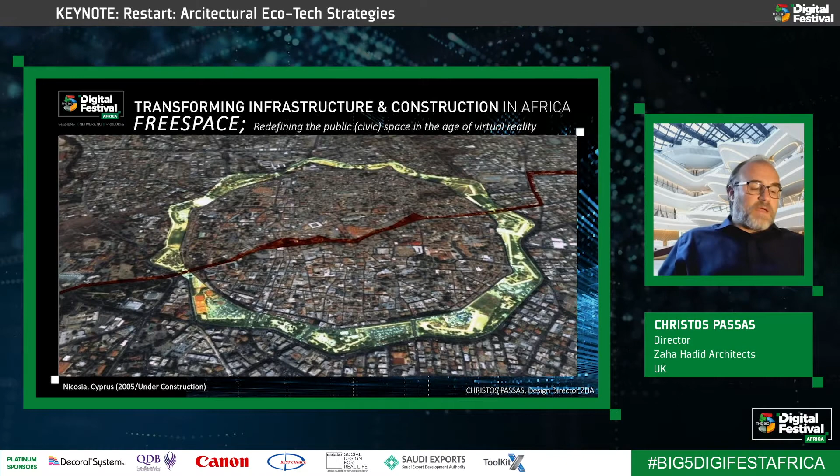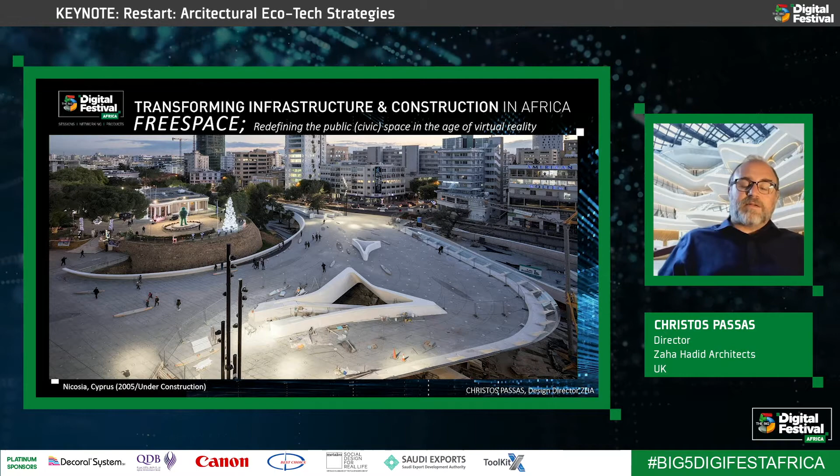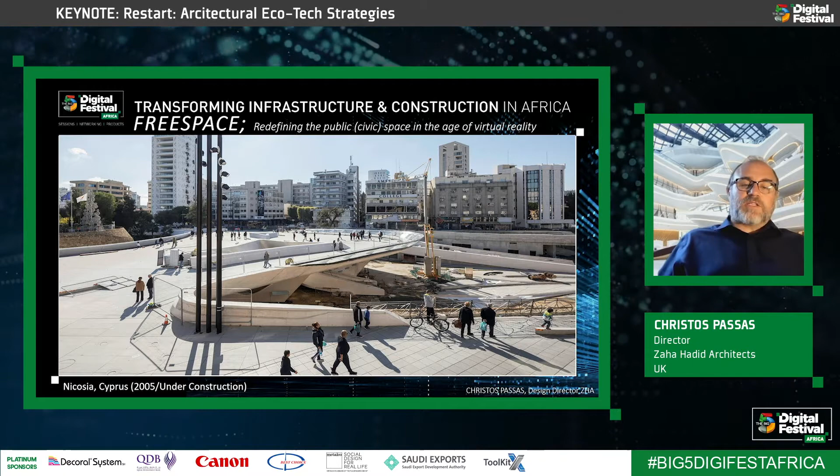In essence, our approach in architectural terms takes the shape of a big white plaza that is floating over the particular moat, and actually becomes a place of congregation, but also a place of transition for the people of this town. So the idea of free space becomes an interesting model for the reinvigoration of urban territories.

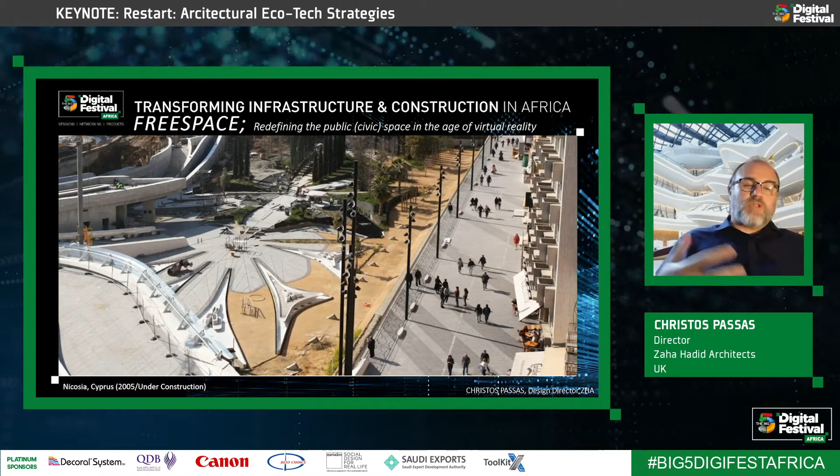By introducing both greenery and landscape, but also civic articulations into the urban domain, it can become much more designed and much more appropriated toward the diversity of functions in cities.

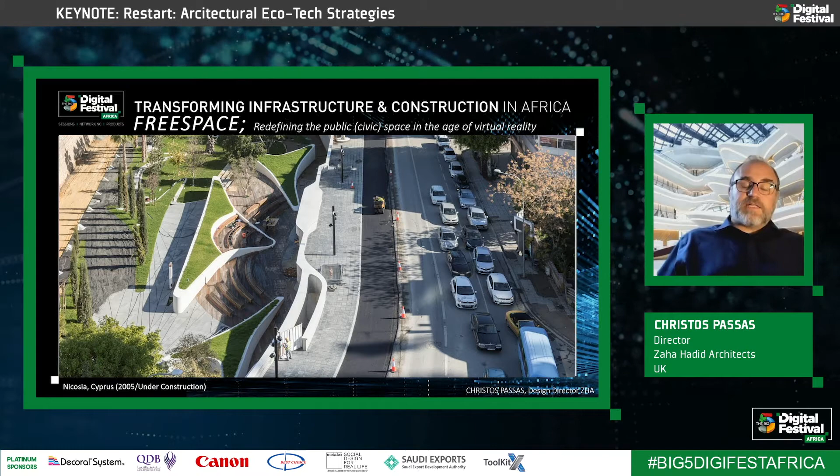And this is the intervention. As you can see, the site that extends from against the Venetian wall makes an intentional attempt to recognize the archaeological monument, while at the same time it comes through as an articulation of a mutant project, a hybrid project that is both architectural and landscaping at the same time.

For me, this is one of the ways through which we can begin to interact with our spaces, but also a means or a method through which we can begin to combine architectural and landscaping techniques together.

This second project I'd like to show you is a project competition we've done for one of our clients in Moscow. It's a project on a very busy site that neighbors a highway, a train station, and also a complex of buildings on the back of our building.

And the program was quite dense because it required a number of facilities such as a business and cultural center, but also a number of other complementary facilities, such as an auditorium for 1,600 people, a school of medicine, an Olympic-sized swimming pool, a train transportation hub.

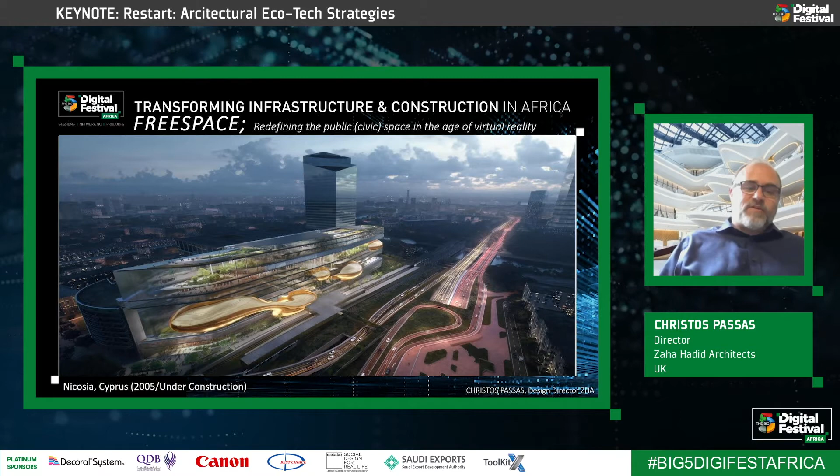So the idea here was to create a number of systems. The shelving system, which is the horizontal floors, are connected by a series of crossing escalators that you can see on this drawing, while at the same time, all the cultural program gets installed within these fluid, bubbly shaped spaces.

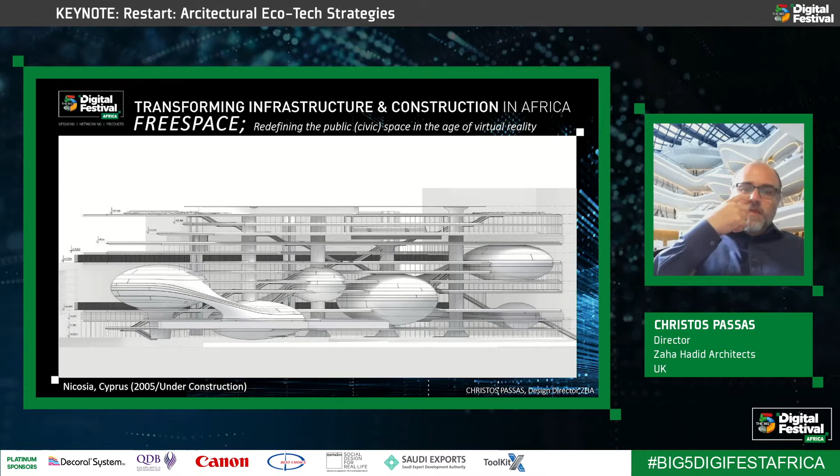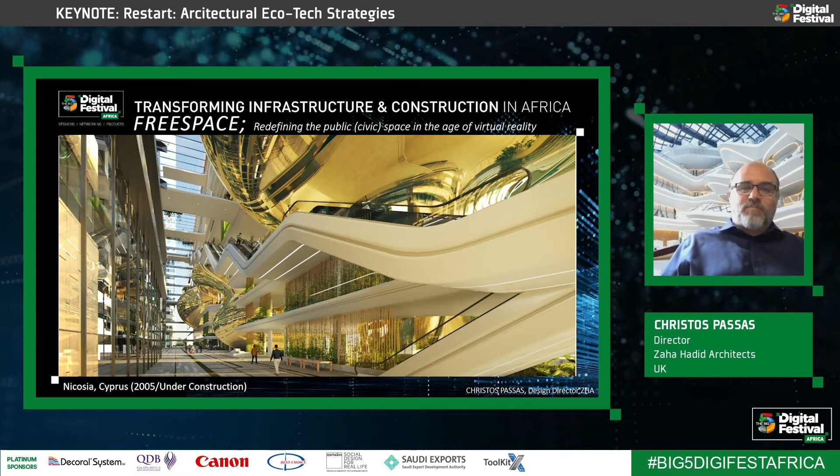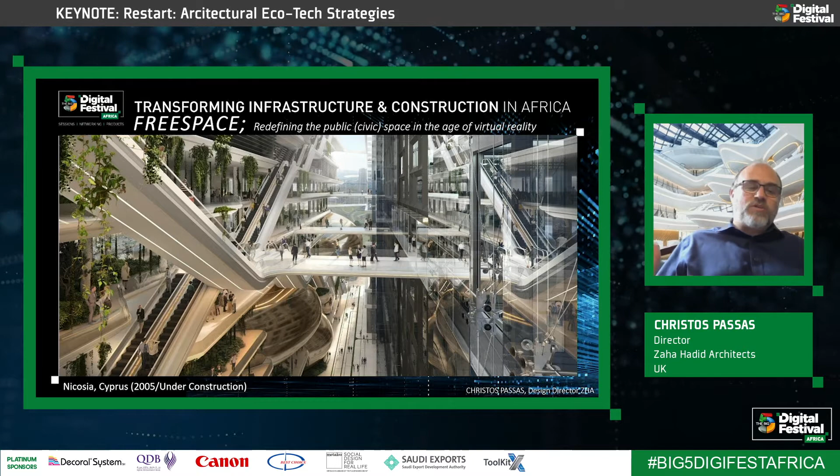And in this way, we develop mechanisms to separate the cultural from the business program, while at the same time proposing free spaces within what would otherwise be a private building, using the occasion of erecting this building to create public spaces, gardens and terraces that come into existence as people begin to use them for public rather than private functions. The space between these two buildings becomes an important interstitial space, where movement of people from the bank, the business institutions, and the cultural components begins to come together in a new type of city that shares this free space.

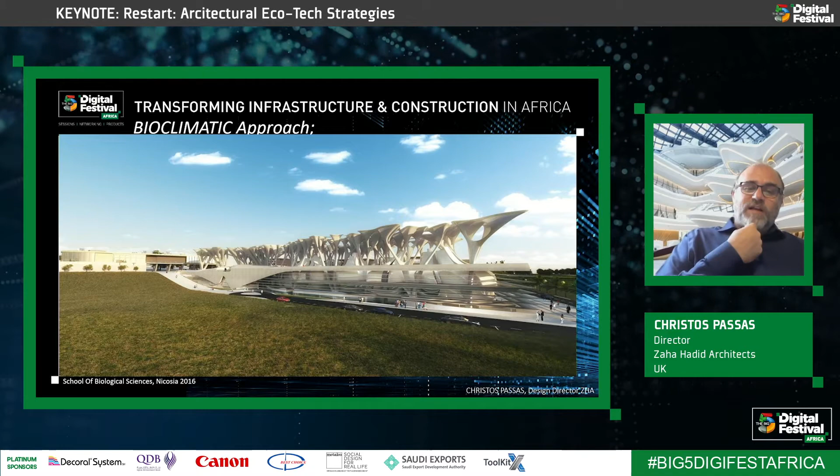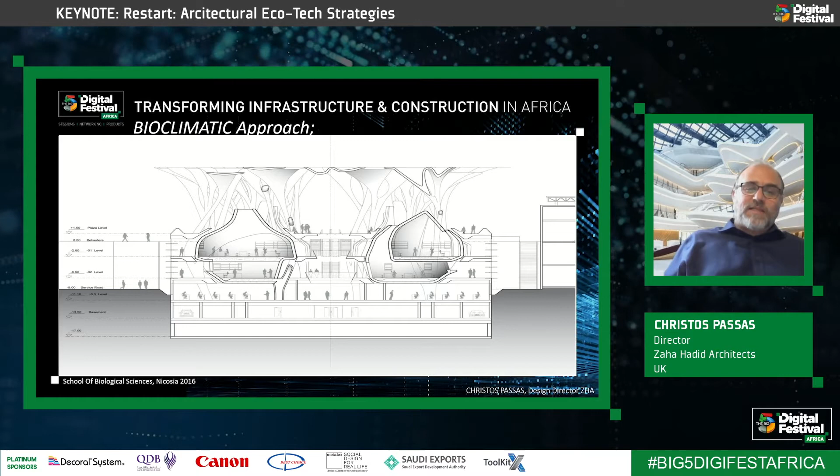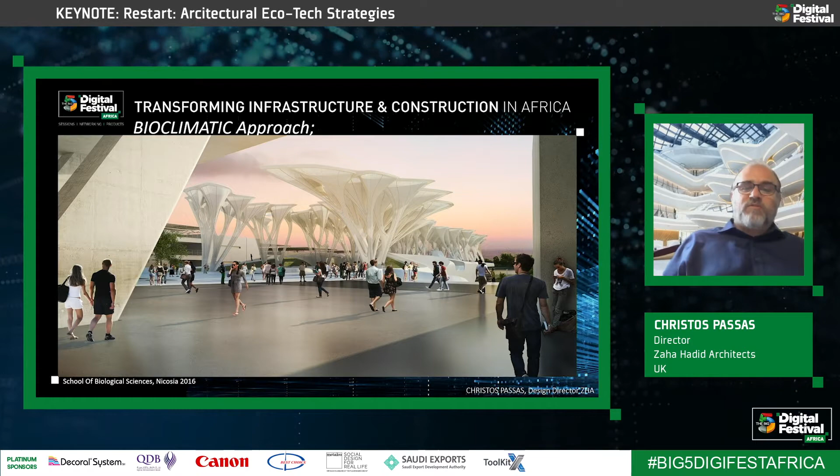However, it's also interesting to observe that these canopies, built out of fabric, can also provide a lot of shading for the spaces below, reducing the thermal heat gain of the project, and in that sense also provide a nicely shaded piazza for the students of the university to meander around. So we believe there are novel architectonic ways to use bioclimatic concerns to create interesting architectural propositions that have both a sustainable angle and a beautiful architectural outlook.

The third approach I'd like to introduce is through a project we did in Belgrade, Serbia, a few years ago. In this case we concerned ourselves quite a lot with the idea of a bionic constellation, meaning the fusion of architectural and landscape design into one whole. Because the program was so complex, it had a number of residences, a business center, a shopping mall, and an existing hotel that needed to be renovated.

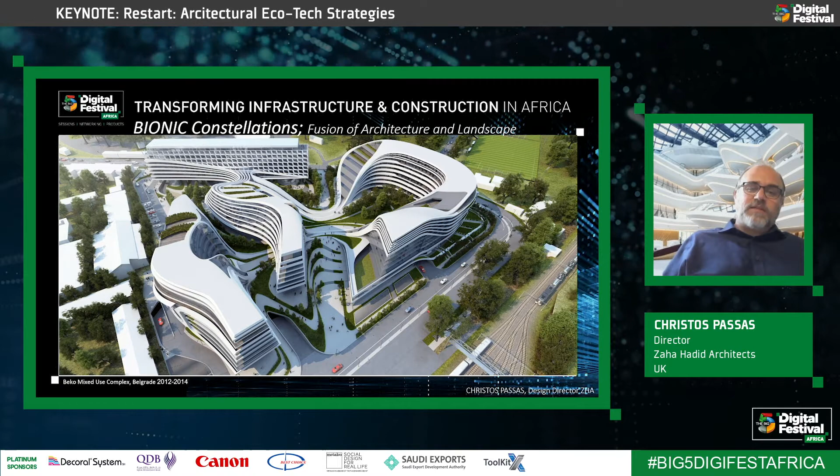We wanted to bring this whole community within one integrated whole, and what better way to enrich this otherwise urban mixed-use environment with a series of gardens and landscape terraces that allow people to enjoy in their day-to-day life. What we've learned is that planning these two things together can open up new possibilities for architectural expression, but also landscape integration into these otherwise large and, in many cases, dry mixed-use developments.

So this idea of developing bionic architectural propositions can also be extrapolated into the idea of 3D cities, meaning constellations of urban projects that come together not as a singular use or as a kind of layered mixed-use program starting from the street level, but by introducing a number of sky bridges, the program can now become a lot more interestingly developed.

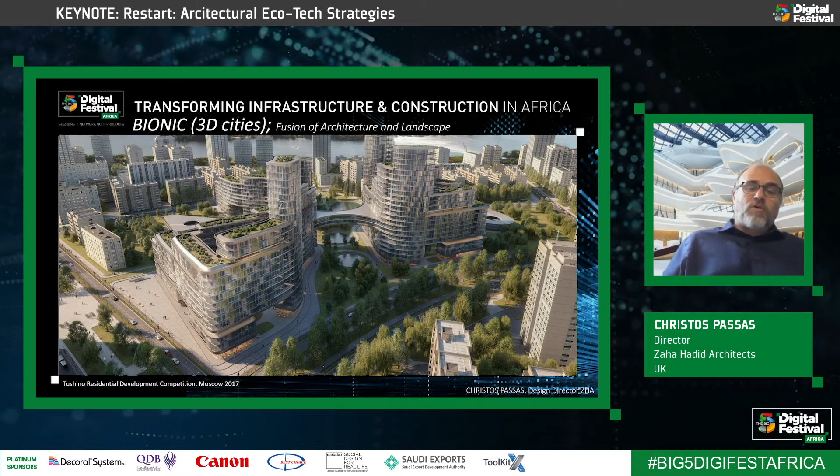In those bridges, one can see retail expanded inside, so people can go shopping without really exiting the complex in which they live, using some of the terraces of the volumes to create sky parks on top of different areas, but also using horizontal program to bring in other functions, such as business functions, public concentrations, and also using the general landscape around them for recreation, for promenades, etc.

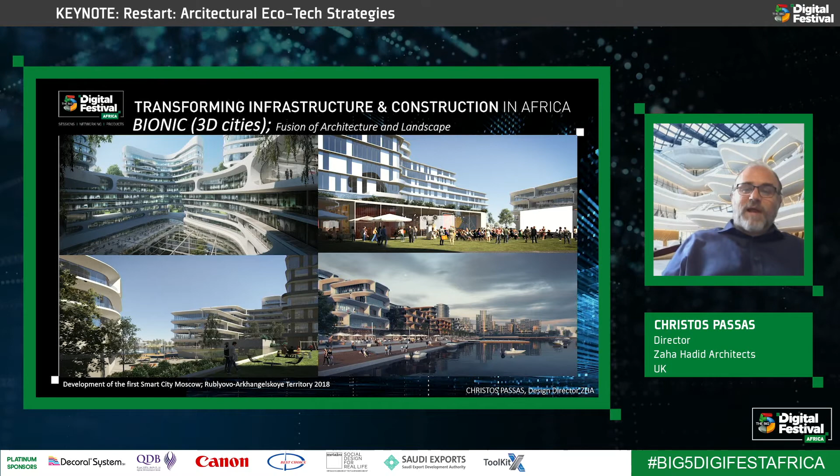So the idea of creating these 3D cities forces us to explore how we can reorganize architectural compositions so that they don't exclusively take the ground as a basis, but create multiple grounds across different levels, enabling horizontal public movement through buildings to enhance circulation and to differentiate to a large degree the program that happens inside them.

Talking about this kind of bionic architecture, we do need to see the purpose of it, and one desired outcome is always this kind of new vitality. In many cases nowadays we're being asked to integrate natural landscapes together with technology. This makes a very interesting proposition, because the development of technology seems to be going hand in hand with our increased understanding of ecological considerations. The more our thinking moves in one direction, it also seems to be moving in another direction as well.

So what I would like to propose is that we bring these two aspects together and fuse them into a new kind of landscape, a new kind of ecology or ecosystem that allows human beings to live within it, but at the same time have the opportunity to be stewards and managers of these ecosystems, protectors of these ecosystems.

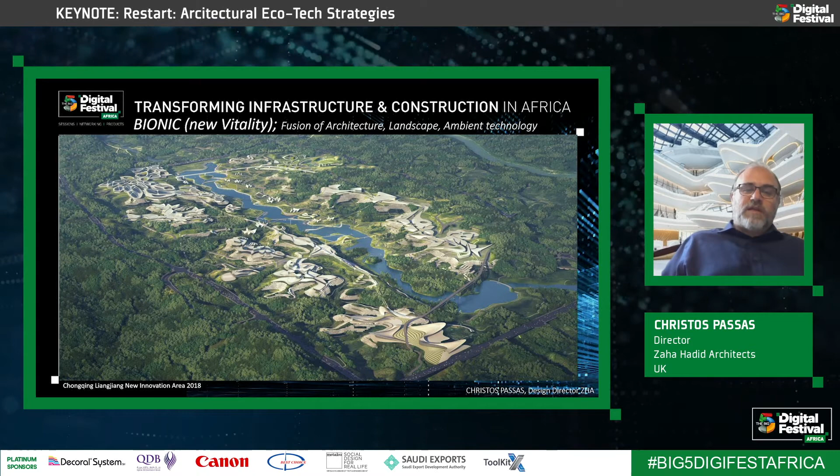In this particular case, this new innovation area in China was developed as a series of high-tech campuses embedded within the hillsides of this valley. Our approach was to divert one of the nearby rivers and flood the valley in the middle so we can create areas of recreation, areas where the buildings could be cooled during their cycle, and at the same time enhance the greenery around it.

Of course, there is a lot of information one needs to absorb in a relatively short amount of time to understand what this environment is all about. So when we went there, we took as much information about this site as we could from the client and other government organizations, and we analyzed these slopes and hills so we could understand what the topography could give us as opportunities for development.

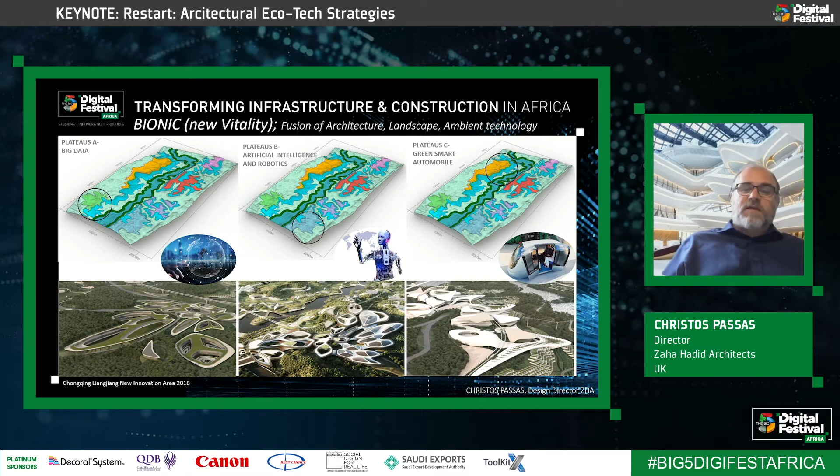Within that, we inserted these underground or submerged campuses for big data analysis centers, for artificial intelligence and robotics factories, and green and smart automobile research centers. Each one of these clusters is an economy or a kind of research institute by itself, while at the same time, the landscape is ever present around them.

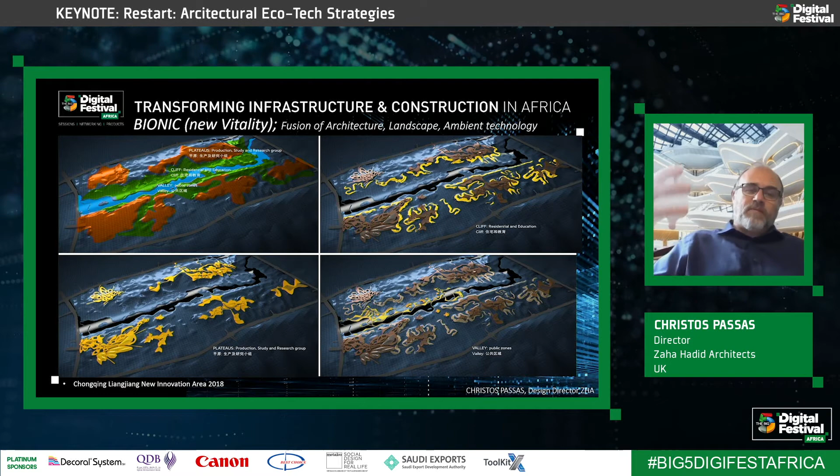By beginning to understand things this way and using digital techniques to analyze these highly complex ecosystems, we can begin to think about embedding architecture in a productive way within the landscape without destroying it and without affecting its life cycle throughout the year.

So the whole point of this is to rediscover the romantic qualities of the natural landscape, while at the same time allowing development to happen, but in a much more sensitive and sensible way as we go forward. So one can see these landscapes as romantic landscapes, like a kind of English garden type approach, but at the same time, it can be highly technological.

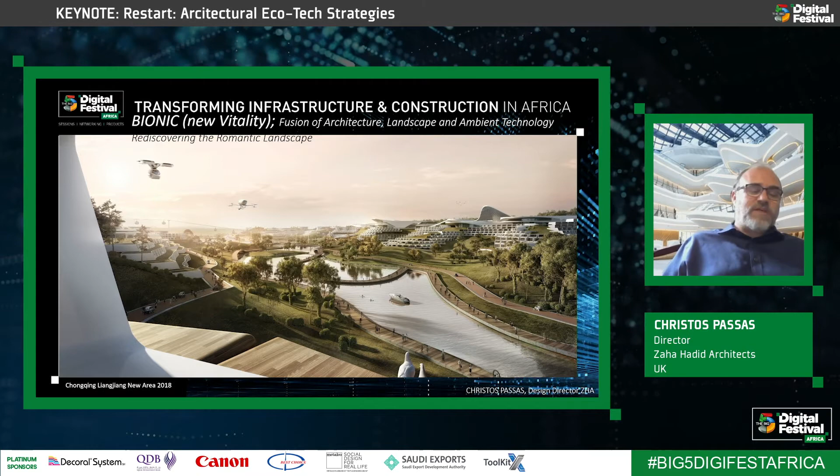It can use smart systems to move people around, and also smart and novel construction techniques to build what may be interesting and complex architectural forms that reflect the necessities of contemporary life and industry.

At the same time, we are beginning to learn that coastal areas have serious risks in terms of rising water levels, but not only that—which is more frequently in the media—there are also other issues in coastal cities, such as high winds and other environmental conditions that need to be negotiated when somebody plans a development on the seashore.

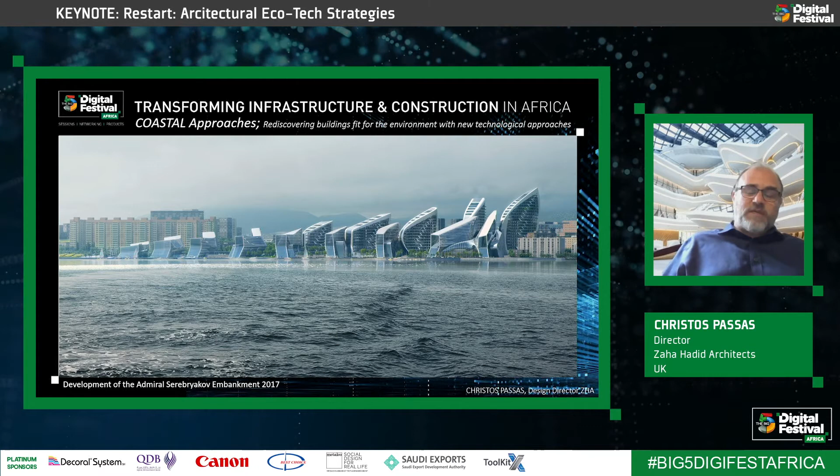In this case, in an area in southern Russia, in a city called Novorossiysk, we were asked to develop a 10-year master plan for the development of a series of buildings that would sit by the shore. The municipality wanted to create a system of growth that would allow them to grow the project over time and create something recognizable enough to be an attractor for business tourism into this port city.

So we came up with the idea to create a system based on a series of buildings as fragments that would constellate together to create new mixed-use programs. Each one of these volumes is either a residential building, a hotel, a conference center, a museum, a retail zone, or an art gallery, so that every time one of these projects was built, it would grow the offering in that particular area.

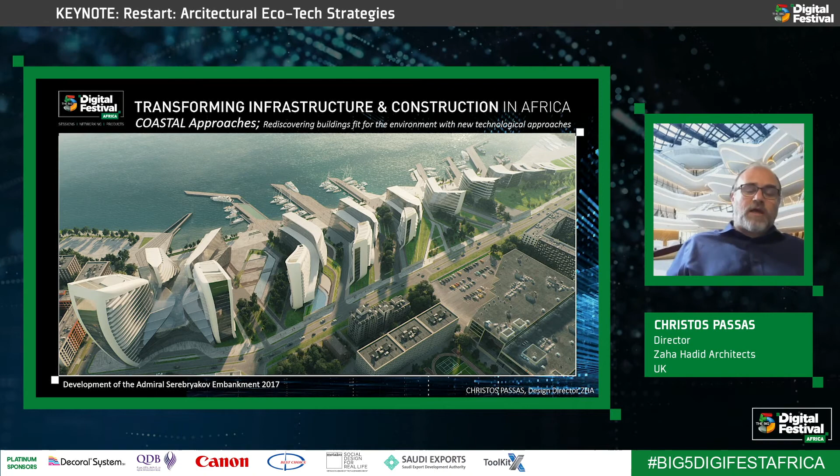At the same time, you'll see that promenade conditions are now becoming possible in this very windy town, because these buildings are beginning to create windshield effects that allow territories within this master plan to be easily used without people being blown away, while each building enjoys views to this beautiful bay on most of the rooms that each one houses.

Another coastal approach that we're proposing here as a method and example is in this case in Dubrovnik, Croatia, where the building becomes part of the natural formation of the landscape. In this sense, it becomes almost like a mask sitting in front of the cliffside.

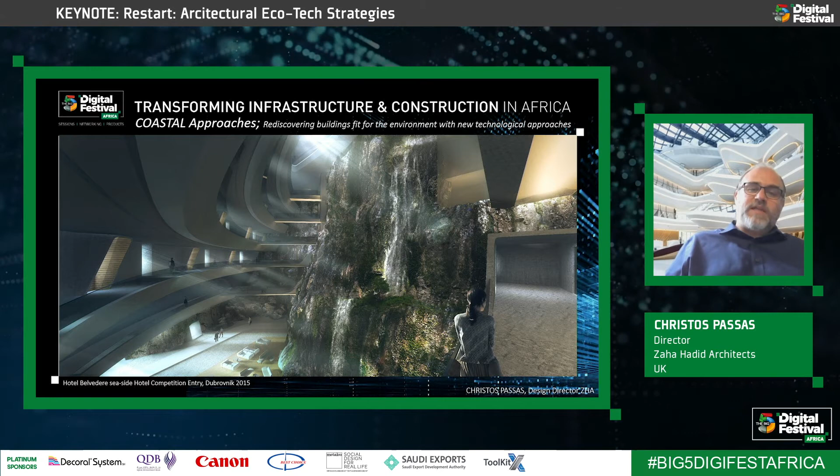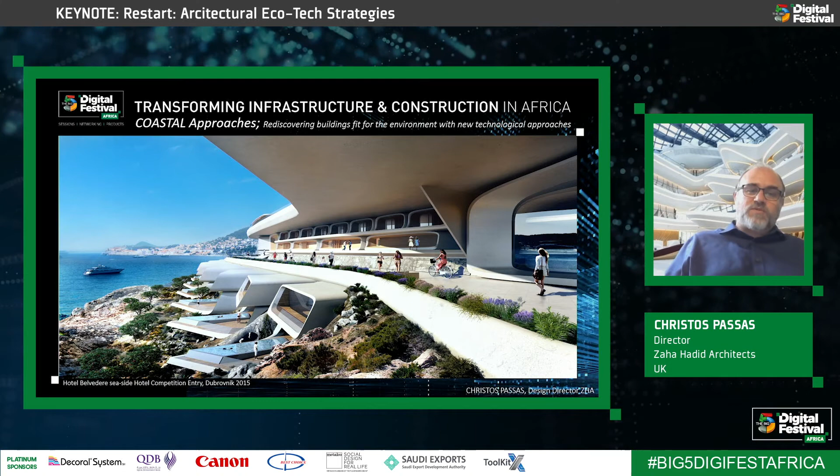By using this approach, we're beginning to explore the possibilities to revisit this very rough and raw rocky formation from the inside of the hotel. At the same time, we can begin to create cantilevering terraces that open up new possibilities for luxury bungalows, but also for passages for the public and guests of this hotel to enjoy a new transformational approach to this cliffside.

And this is what the project looks like. It's a cliffhanger, almost something that hangs off of the cliff. We're not afraid to approach certain elements this way, and as you can see, the building is very nicely embedded within the natural landscape here.

So talking about recreation, mixed-use buildings, etc., what happens in the workplace? The image I showed you in the beginning with the demonstration in Syntagma Square in Athens is one example. But before the whole COVID pandemic started, we were very much engaged in redefining workspaces, moving away from either the open or the closed plan office, and instead producing paradigms and architectural geometries that would enable us to create privacy and openness in the same spaces.

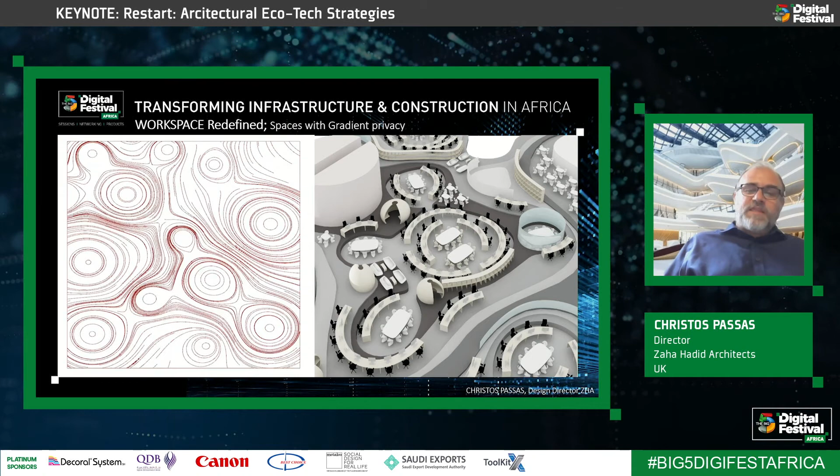So what we're looking at is a series of diversified new generation office spaces where people can have different degrees of privacy or enclosure versus openness or social interaction. As you can see in this diagram at the bottom of the page, the social, the collaborative, the isolated or enclosed, and the open spaces are all coexisting inside the same domain.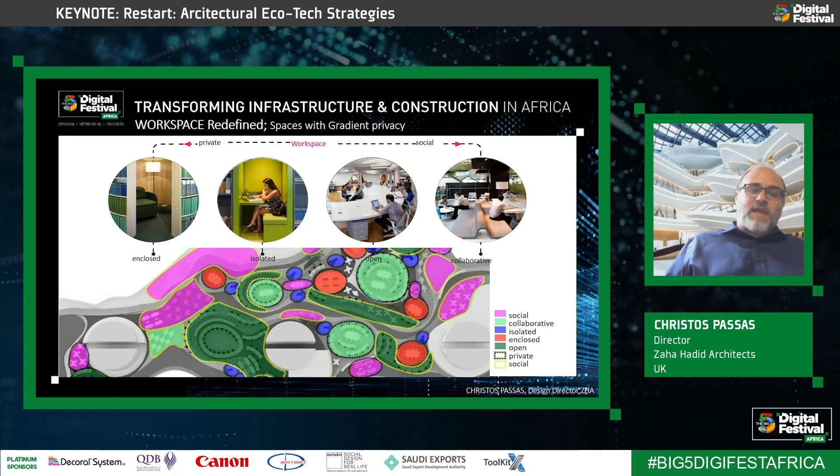And what that allows us to do is begin to look at office spaces as ecosystems of human activity with different needs, and in that sense also become much more efficient and potent places for companies to be able to constantly reorganize.

Here we are seeing, for example, two possibilities for how to furnish the office spaces, but of course there are a myriad of other possibilities to organize these floor plates in a way that they always reflect the busyness and also the kinds of projects and tasks that a company has to work with in parallel.

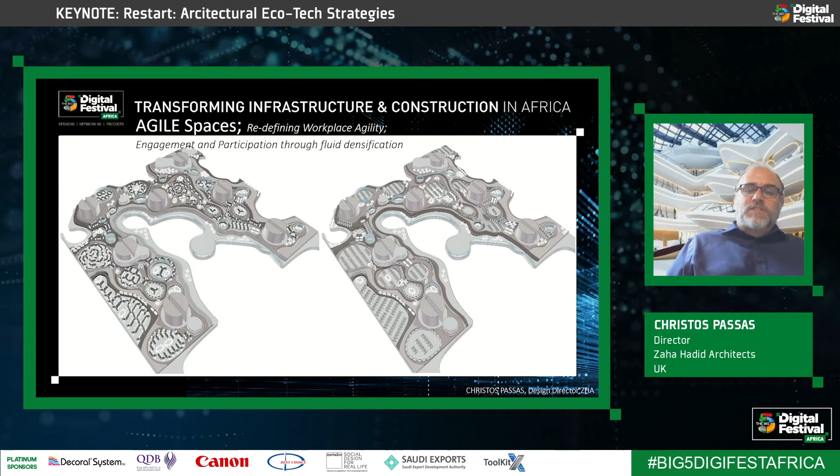So the building looks again rather strange, but it is based on this idea of circular agglomerations, bringing circular spaces together. Each circle corresponds to one project team, and therefore all the different project teams coming together create these interconnected ecologies between one another.

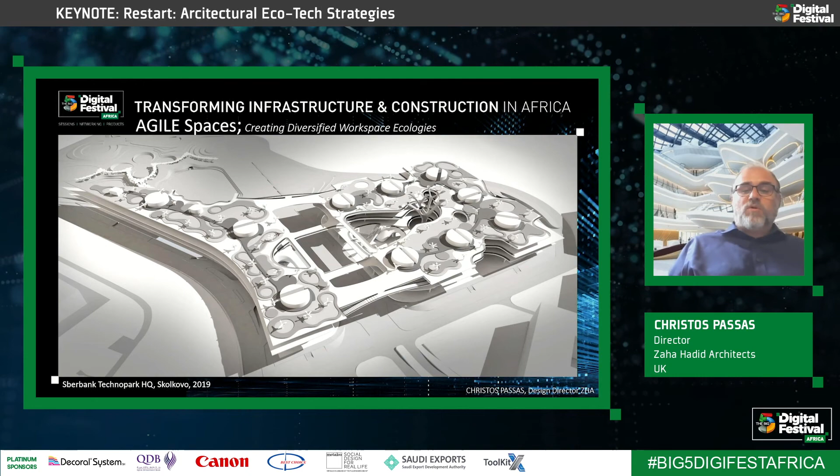And of course, here the ultimate aim is to create spaces of a company that engages its employees by showing and having an open door policy, as it were, to what is happening within the whole company, so that everybody can see the overall activity.

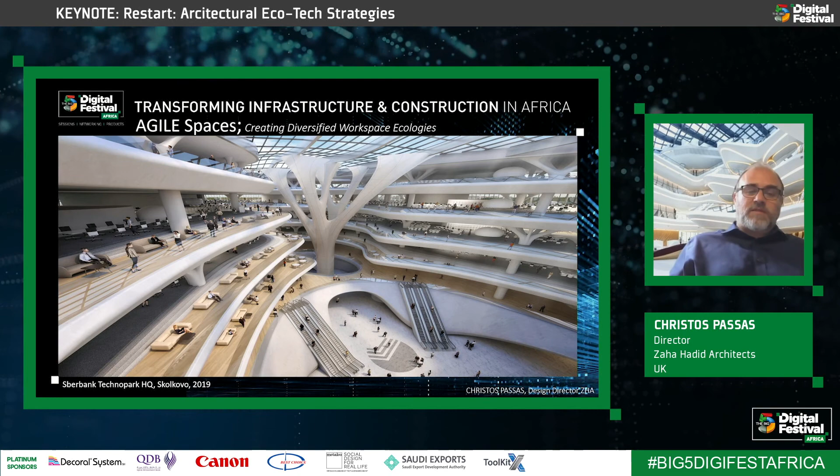The building itself features some large atria. These open voids basically allow the users of this building to see through the building, to get an overview of what the whole company is doing, and in that way also enhance navigation, orientation through the building, but also engagement with the company as a whole.

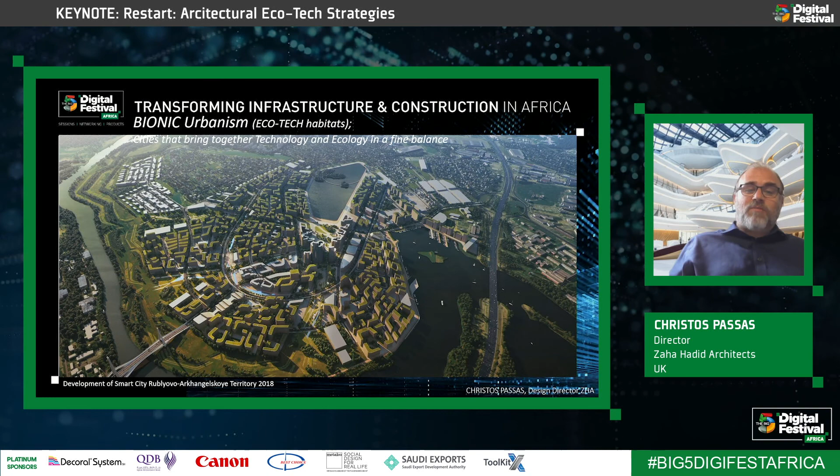One more project I'd like to show applies these ideas I've spoken about so far, but in this case as an urbanistic project, a large-scale bionic urbanism approach, the so-called ecotech habitats, where we're beginning to combine technology and ecological considerations to see how these new cities can become much more appropriate for the type of knowledge about the environment, but also the type of knowledge we're developing on a technological level.

One way is to create cities and urban centers that are able to facilitate different lifestyles, different points of view, different activities, different interests, but at the same time provide growth and a feeling that people investing in this kind of new habitat by living their lives there—I don't mean investment in money, but investment in time and commitment—means they are all coming together to create a kind of new reality.

And of course, all these lives coming together can give rise to all sorts of other projects. Here, for example, are ecotech habitats presented in different ways. They can be in different parts of the world and in different landscapes—whether in the desert, the sea, the mountains, or the valleys—they can always become feasible if we begin to look at those two components together.

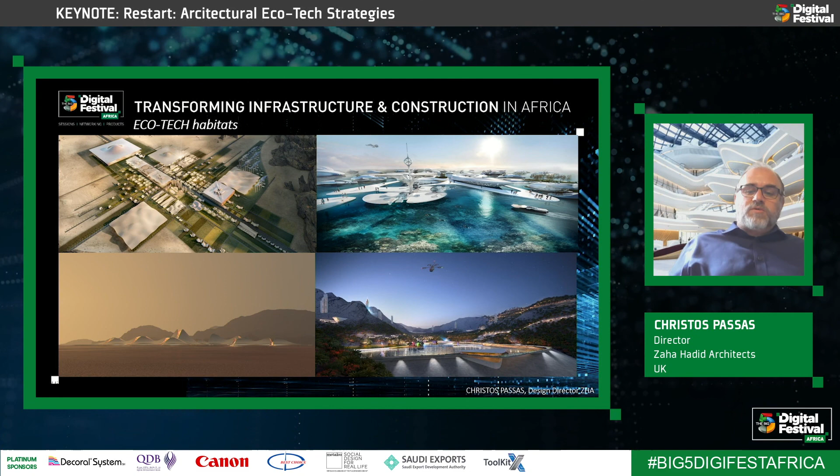So in this short amount of time that we had together, I hope that I conveyed some of these messages to you clearly, and I thank you for your attention.